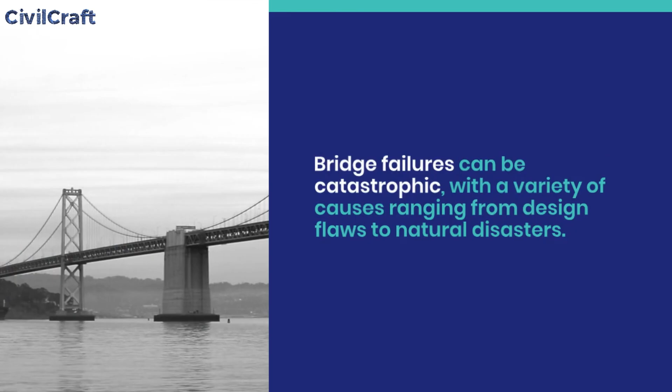Bridge failures can be catastrophic, with a variety of causes ranging from design flaws to natural disasters. Here are some of the most notable bridge failures in history.

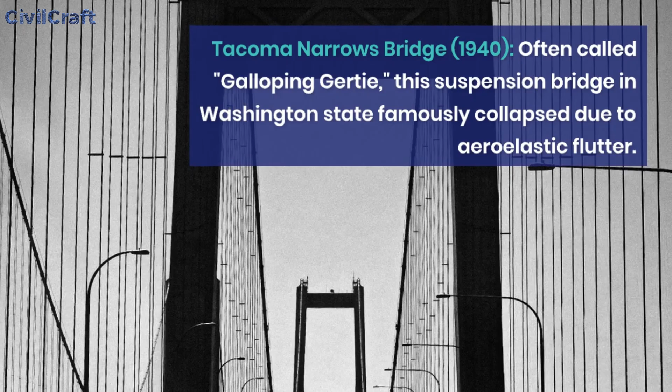1. Tacoma Narrows Bridge, 1940. Often called Galloping Gertie, this suspension bridge in Washington state famously collapsed due to aeroelastic flutter. Strong winds caused the bridge to oscillate violently until it disintegrated.

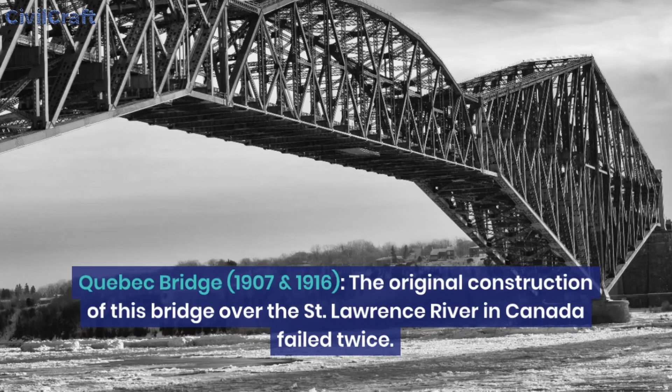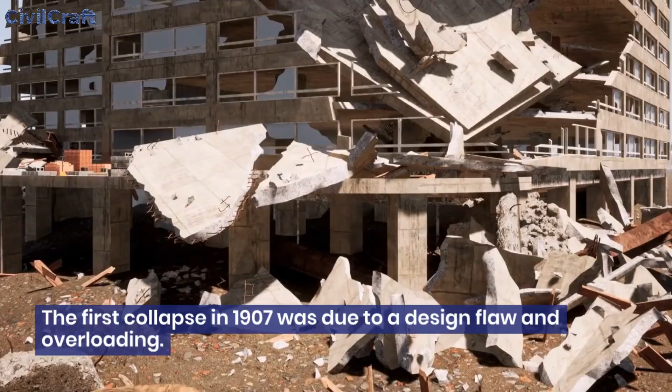2. Quebec Bridge, 1907 and 1916. The original construction of this bridge over the St. Lawrence River in Canada failed twice. The first collapse in 1907 was due to a design flaw and overloading. The second collapse in 1916 was caused by structural deficiencies and poor construction practices. It remains the longest cantilever bridge span in the world.

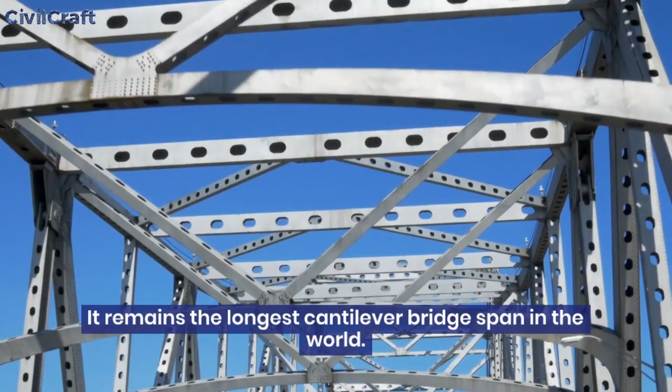3. Silver Bridge, 1967. This suspension bridge spanning the Ohio River between Point Pleasant, West Virginia, and Gallipolis, Ohio, collapsed due to the failure of an eye-bar in the suspension chain. The failure was exacerbated by corrosion and poor maintenance.

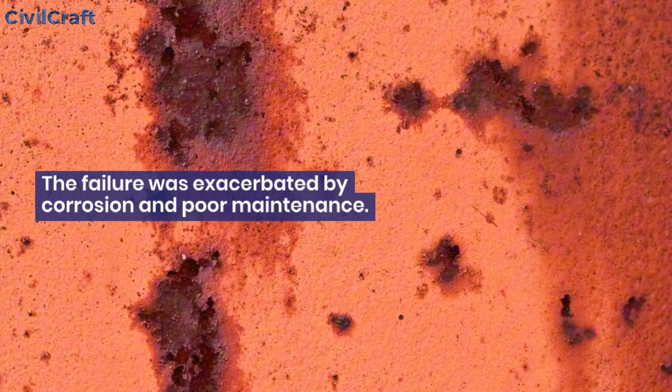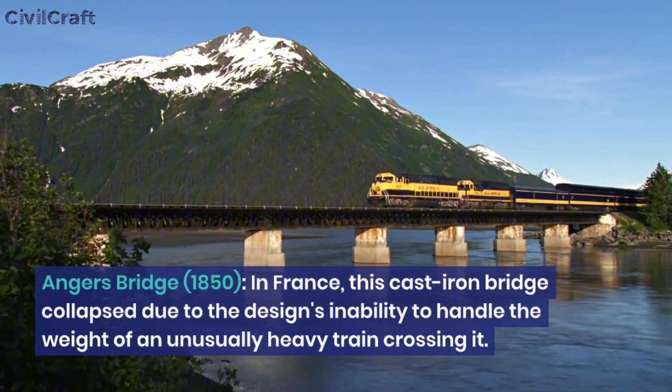4. Angers Bridge, 1850. In France, this cast-iron bridge collapsed due to the design's inability to handle the weight of an unusually heavy train crossing it. The failure was a significant event in the history of bridge engineering, highlighting the limitations of cast iron.

5. Belfast's Queen's Bridge, 2001. This bridge in Northern Ireland suffered a major failure when a ship collided with one of its piers. The collision caused a significant structural failure but fortunately did not result in loss of life.

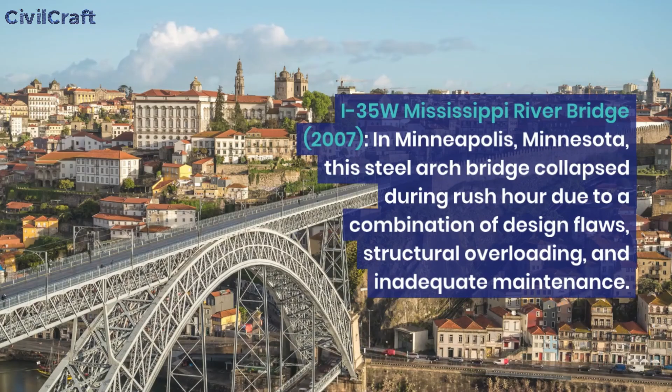6. I-35W Mississippi River Bridge, 2007. In Minneapolis, Minnesota, this steel arch bridge collapsed during rush hour due to a combination of design flaws, structural overloading, and inadequate maintenance. 13 people died, and many more were injured.

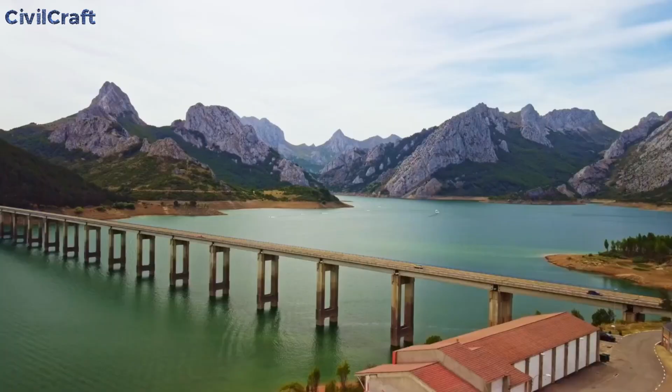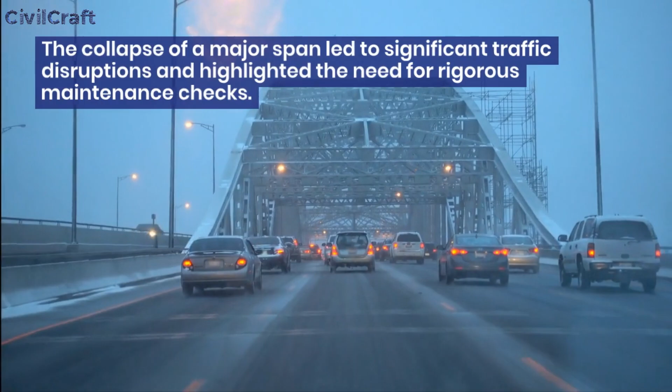Avoiding bridge failures or collapses involves a multifaceted approach encompassing design, construction, maintenance, and monitoring. Here are several key strategies to help ensure bridge safety.

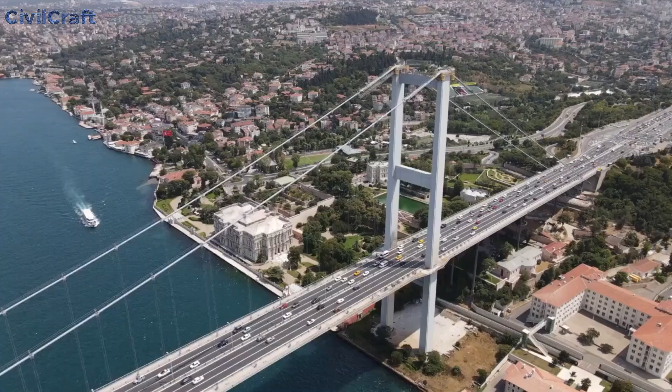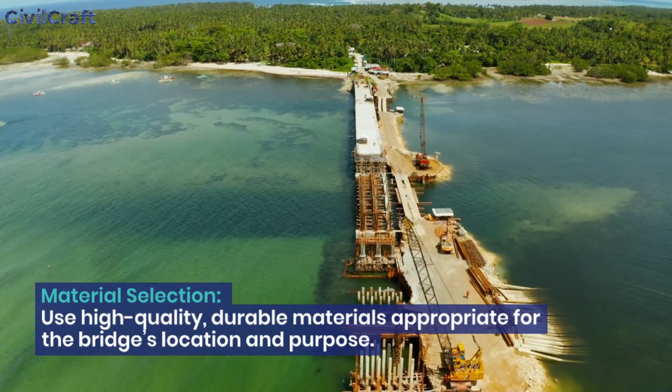Thorough design and engineering. Adherence to standards: follow established engineering standards and codes for bridge design. Load testing: design bridges to accommodate expected traffic loads and environmental conditions. Material selection: use high-quality, durable materials appropriate for the bridge's location and purpose. Seismic design: incorporate features to withstand seismic activity if the bridge is in an earthquake-prone area.

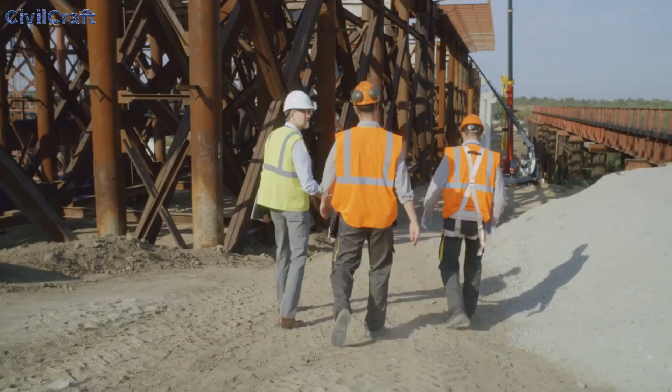Quality construction practices. Skilled workforce: employ experienced engineers and construction workers. Proper inspection: ensure that all construction phases are inspected and comply with design specifications. Quality control: implement rigorous quality control procedures for materials and workmanship.

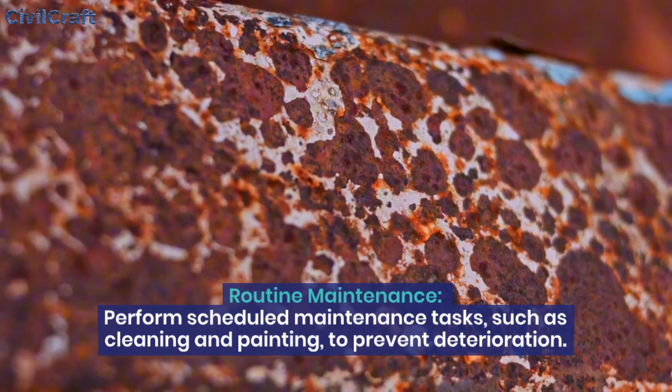Regular maintenance and inspections. Routine inspections: conduct regular visual and structural inspections to identify and address issues early. Routine maintenance: perform scheduled maintenance tasks, such as cleaning and painting, to prevent deterioration. Repair and rehabilitation: address minor issues promptly before they develop into major problems.

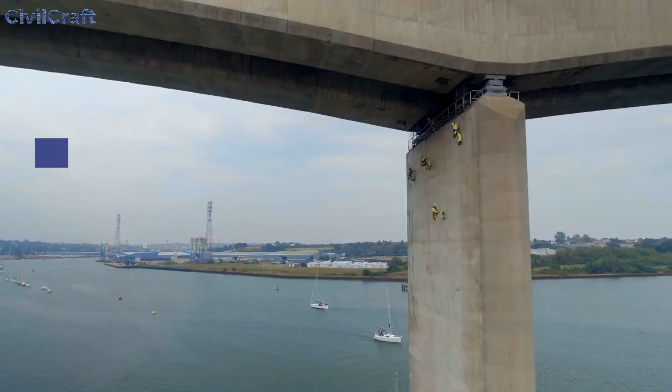Monitoring and technology. Structural health monitoring: use sensors and monitoring systems to track the bridge's health and detect early signs of distress. Load monitoring: implement systems to monitor the load on the bridge in real time, especially for critical structures.

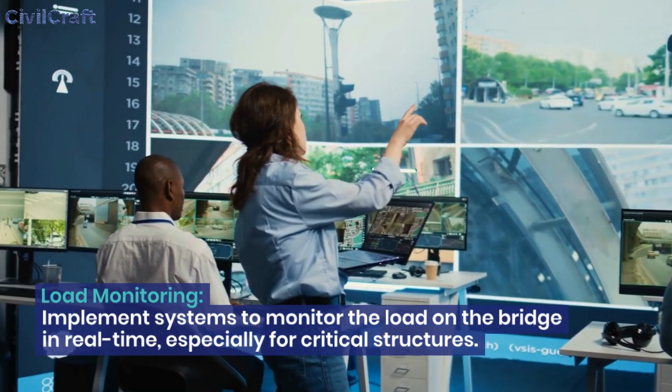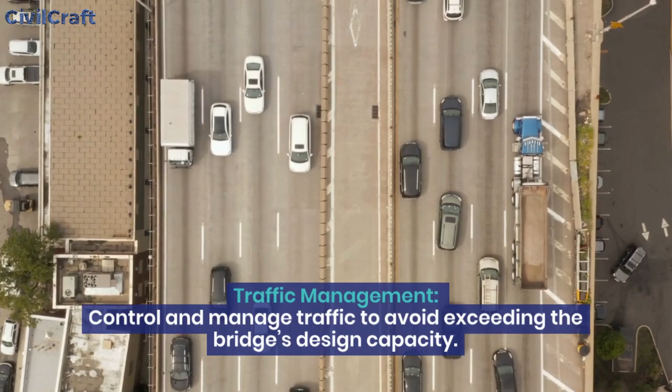Load management. Weight limits: enforce weight limits to prevent overloading. Traffic management: control and manage traffic to avoid exceeding the bridge's design capacity. Emergency preparedness. Response plans: develop and practice emergency response plans for bridge failures or severe damage. Public awareness: educate the public and transportation authorities about safe practices and emergency procedures.

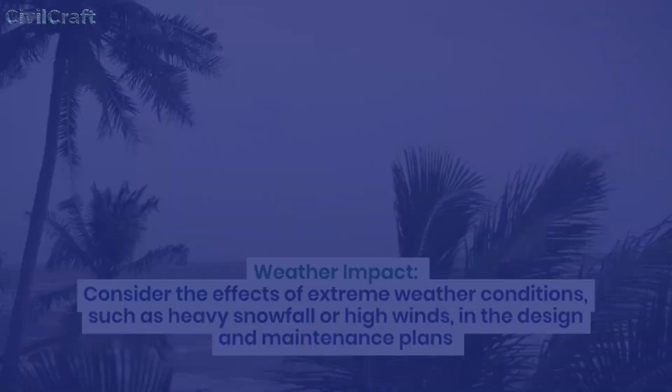Environmental considerations. Hydrological analysis: assess and manage the impact of water flow and flooding on bridge foundations. Weather impact: consider the effects of extreme weather conditions, such as heavy snowfall or high winds, in the design and maintenance plans. Regular review and updates. Design updates: periodically review and update bridge designs based on new research and technological advancements.

By integrating these practices into the life cycle of a bridge, from design and construction to maintenance and monitoring, the risk of failure can be significantly reduced.